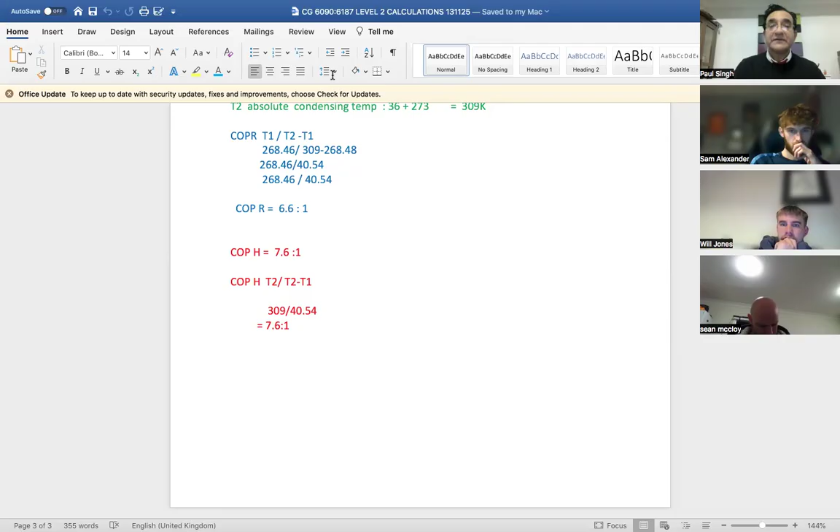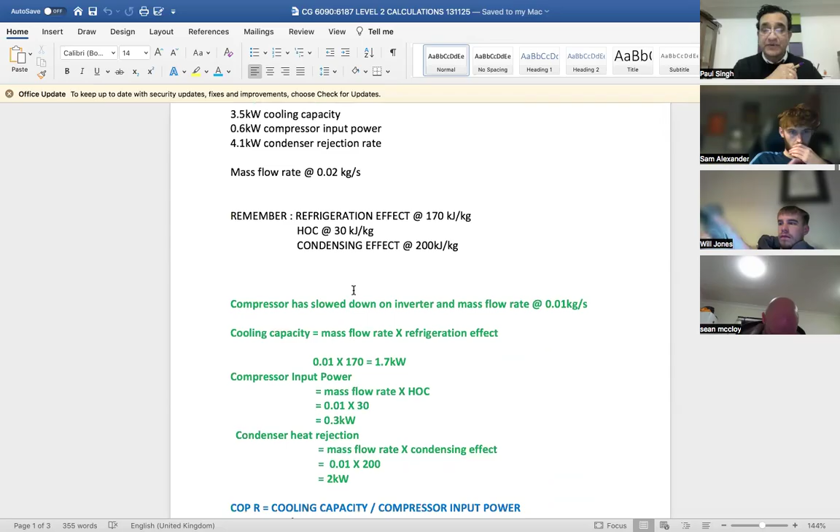Briefly, I'm not going to do the whole lot again, but we're just looking here at pressure enthalpy diagrams and enthalpy, refrigeration effect, heat of compression, condensing effect. Then we're looking at the capacities, mass flow rates, times heat of compression and stuff. It's this formula that eventually you'll need to understand and be able to apply for the online tests.

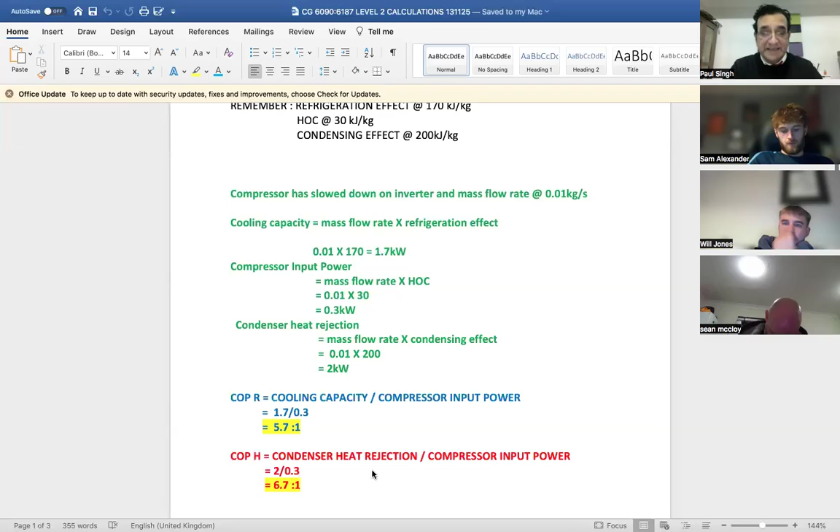And then I went into compression ratio, so pressure ratio, compression ratio: it's absolute discharge pressure divided by absolute suction pressure. And we did some examples.

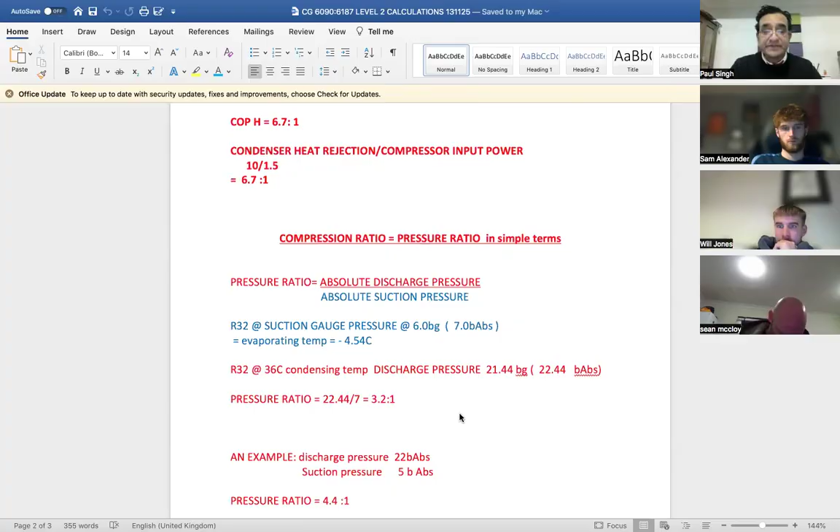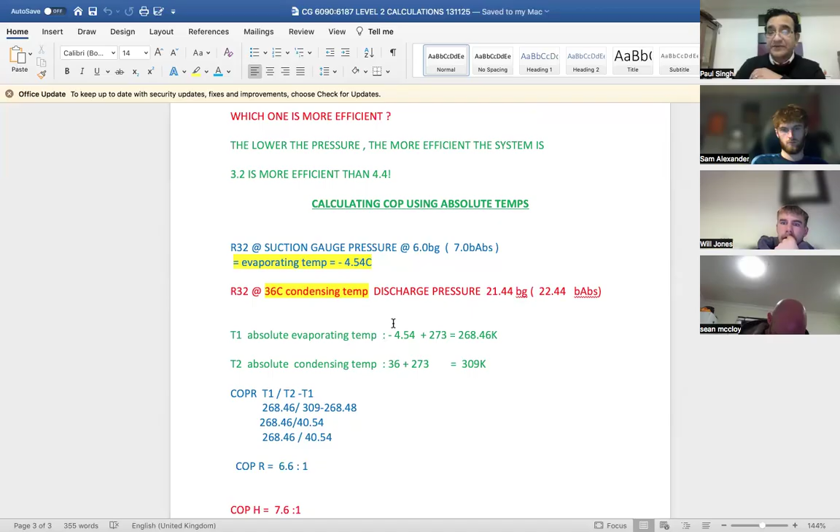And then we also looked at using the temperature and the entropy, well the temperature in particular. So looking at this one here, we said, look, we've got the suction pressure that relates to an evaporating temperature. We've got the discharge pressure, which relates to a condensing temperature. And converting those to absolutes, we can actually work out the COPR and the COPH.

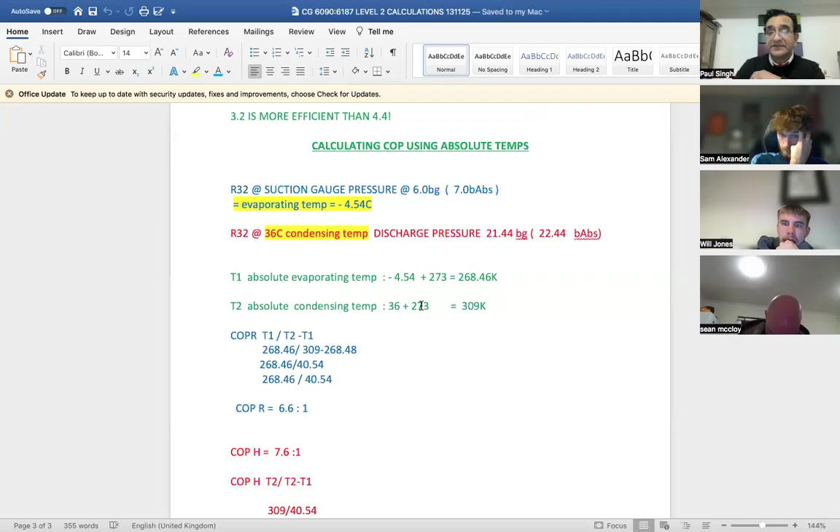So on this one here, we've got evaporating temperature minus 4.54, add 273 to give us 268.46, and then discharge, so condensing temperature 36 plus 273 gives us 309.

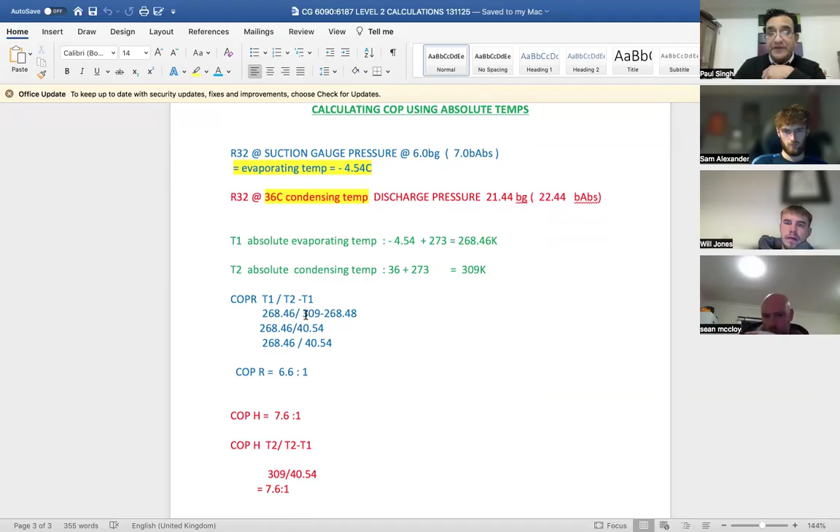And then if we're looking at COPR: COPR equals T1 divided by T2 minus T1. So the evaporating temperature is 268.46 on the Kelvin scale, and you divide that by the difference, 309 minus 268.48, and that mathematically comes out at 6.6 to 1. So the COPR, refrigeration, is 6.6 to 1.

And then COPH, we've got the situation where that's 7.6 to 1. And how we get that: we say T2, which is condensing temperature, divided by T2 minus T1, which is 309 divided by 40.54, which is 7.6 to 1. So these should marry up in the sense that COPR plus 1 is your COPH.

Okay, so I'm just going to concentrate, I'll put the date here: 20th of the 11th, 25.

And so let's say that we've got evaporating temp. Right, we're saying evaporating temperature, let's say that's at 0 degrees C there. So I'll change this to blue.

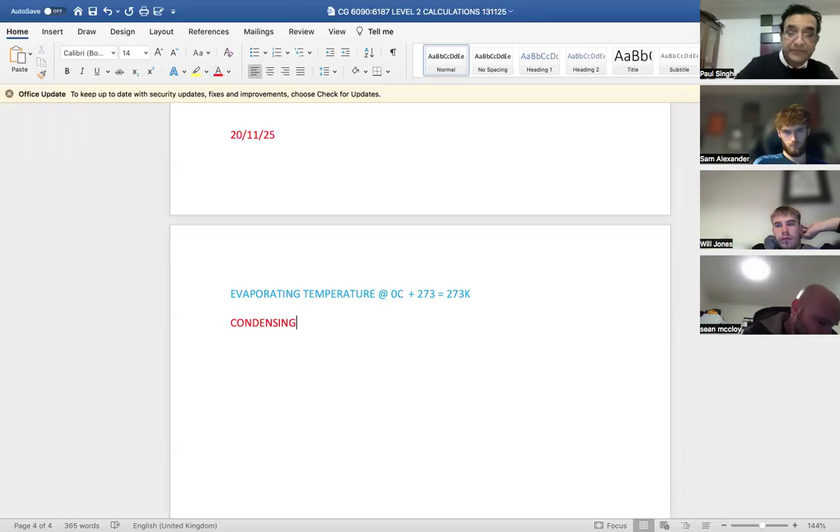And if we add 273, that's going to give us 273 Kelvin. And then if we set the discharge temperature, condensing temperature, that's at...

Let me just get Liam involved. Hi Liam. Yeah, all right Paul. Sorry, yeah I'm good, thanks. You okay yourself? Yeah sorry mate, I was doing something. Okay, not to worry.

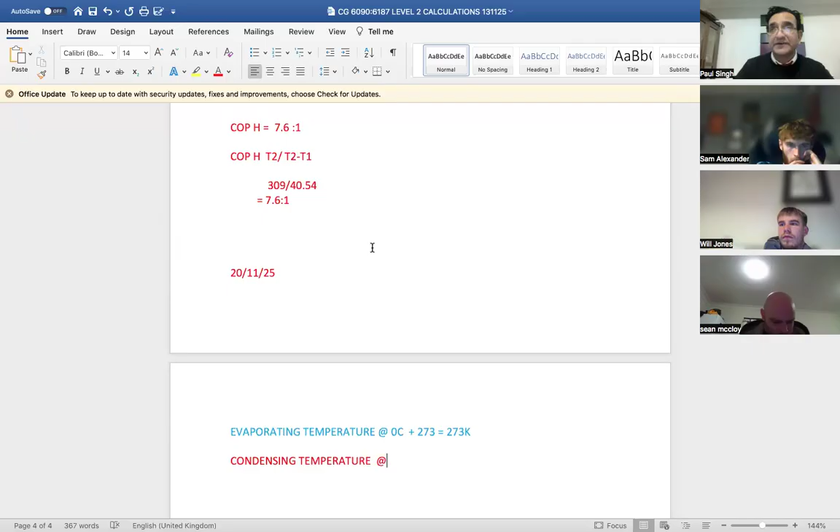I'm just going to continue, Liam, with the calculation we did last week. We did T1 divided by T2 minus T1 to get the COP. So we've got an example here: evaporating temperature is at 0, add 273 it's 273 Kelvin. And if we've got the condensing temperature at 40, we add 273 to it, and that gives us 313 Kelvin.

Hi Jamal, you okay? Yes, hello Paul, sorry I keep having trouble joining your links, I don't know why, sometimes I have problems every week joining it, every single week. Is that because of the web? I have to type it in manually, I've learned that now. Every week I'll have to look at why, because normally I'm not on the receiving end of what I'm sending out, but we can have... It works for Gaz, he told me he just clicks on it, but when I do it just will not have it. Yeah, it works for me as well, I just press on it and it loads.

Okay, so what we're saying is here - hi Owen. Hi Paul, sorry about being late. No, that's fine, so we're just continuing on doing another example of COPR, COPH using T1 and T2. So we got here evaporating temperature is 0 plus 273, that gives us 273. And the condensing temperature, 40 plus 273 is 313.

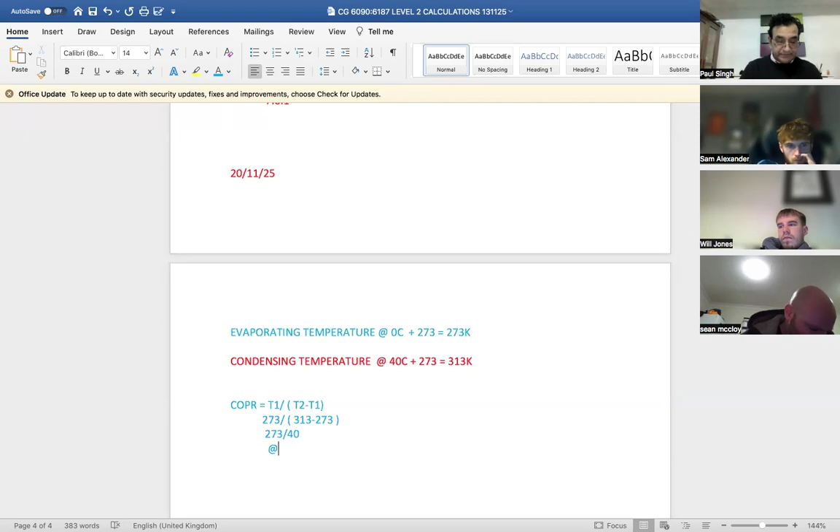Okay, that's going to give us 273 divided by 40. If we do the maths on that, 273 divided by 40 gives us 6.825 to 1.

Now, knowing that the COPR is 6.825 to 1, let me change my pen to red. So COPH, what would that be then, without doing any calculation, from knowledge? We've got COPR 6.825 to 1, then your COPH, what would that be? Any thoughts? So what that will be, it'll be COPR plus 1. I'll change the color to blue.

So we're saying it's 6.825 plus the 1, which equals 7.825 to 1.

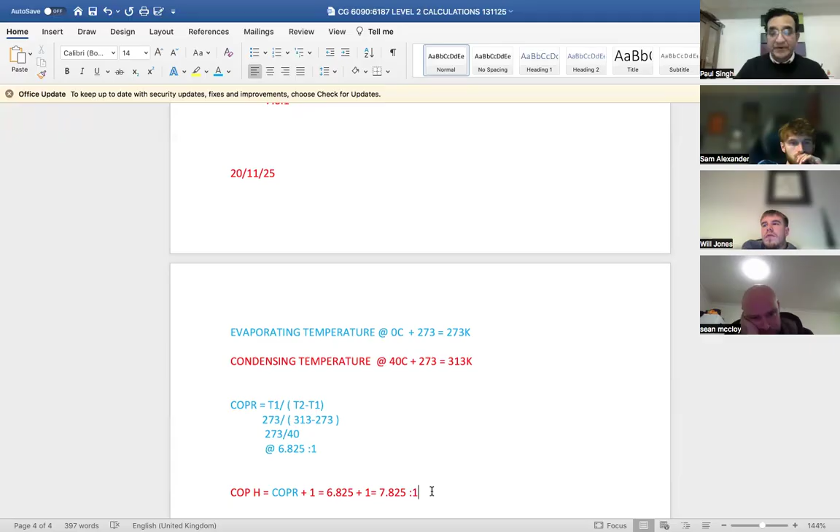And that's using a temperature scenario. What I do want to ensure is that you know what that means. So what does this mean? This is a revision, and I want to go over what this means.

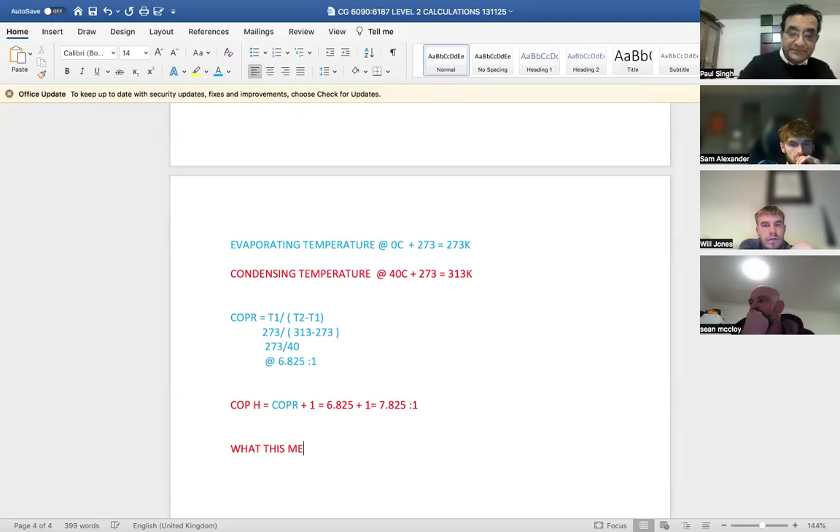So what this means is, let's say we've got a 1 kilowatt compressor. In that case, if you're looking at COPR at 6.825, it means a 1 kilowatt compressor gives 6.825 kilowatts of cooling.

And a 1 kilowatt compressor, on the heating or condenser side, is going to give us 7.825 kilowatts of heating. Does that make sense? So what I'm saying is, you've got a 1 kilowatt compressor, because the COPR is 6.825 to 1, it gives us 6.825 kilowatts of cooling and 7.825 kilowatts of heating.

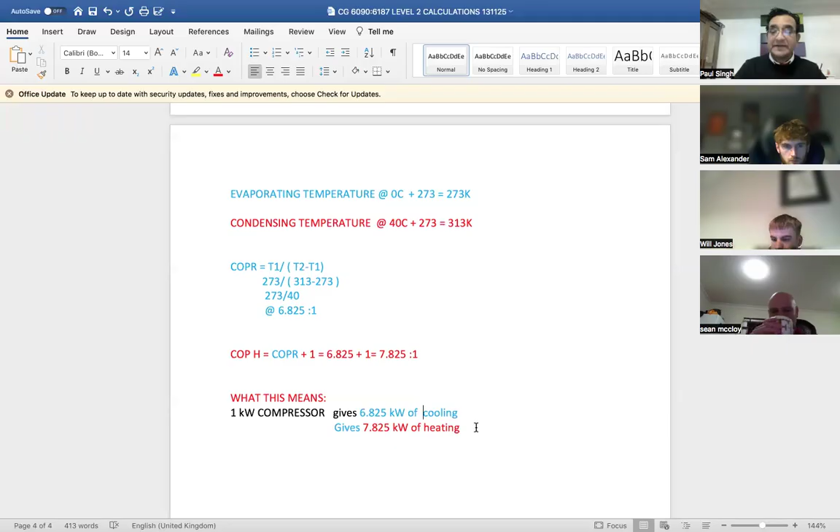Now, if that compressor is doubled, say 2 kilowatts, it's going to double that. If it's 3 kilowatts, it's 3 times - it's a ratio. I want to show you that efficiency. So we're getting 6.825 to 1 and 7.825 to 1. Let me give you a comparison, just to drive it home as a revision discussion.

If we consider an electric heater rated at 1 kilowatt, it will give 1 kilowatt of heating. So you've got 1 kilowatt going into it, and 1 kilowatt coming out of it. What we're saying here is we've got a compressor that's 1 kilowatt rated, and because of the air conditioning cycle, we actually get 7.825 kilowatts of heating out of it. So it's 7.825 times more efficient.

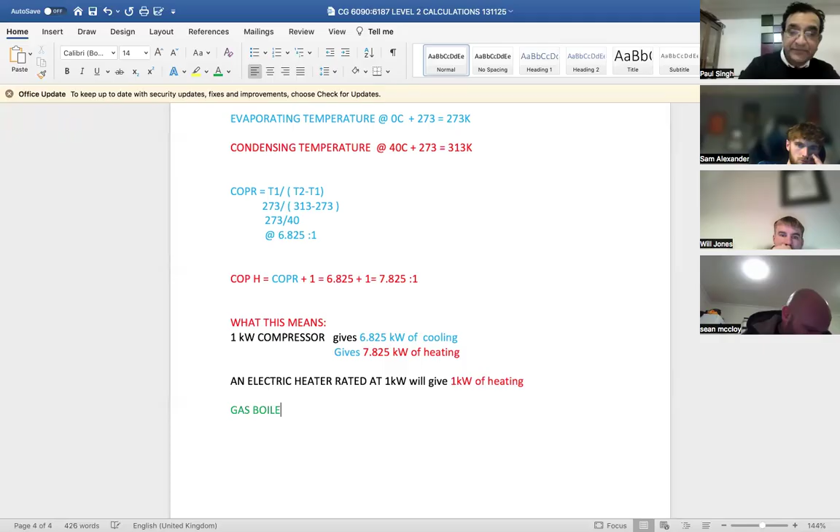I want to take this a bit further, particularly with heat pumps around and stuff like that. If we consider a gas boiler - and I'm going to be asking the gas boiler guys - what kind of efficiency do we get out of a gas boiler, percentage-wise? Any thoughts? 20%? 20% efficient, or you're losing 20%? Losing 20%. So Will's saying the gas boiler efficiency is approximately 80%.

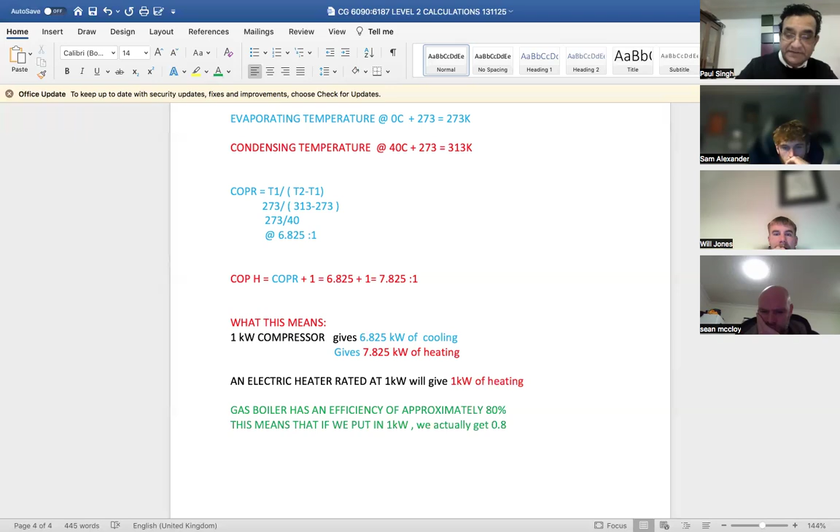80%. Now what that means is, if we put in 1 kilowatt, we actually get 0.8 kilowatts. So you can see if you look at gas-fired boilers, because their efficiency is less than 1, they're very inefficient - that's 0.8 efficient. We're putting in 1 kilowatt and only getting out 80% of that. And if it's 2 kilowatt rated, we get double that, 1.6 for 2. So that gets less and less.

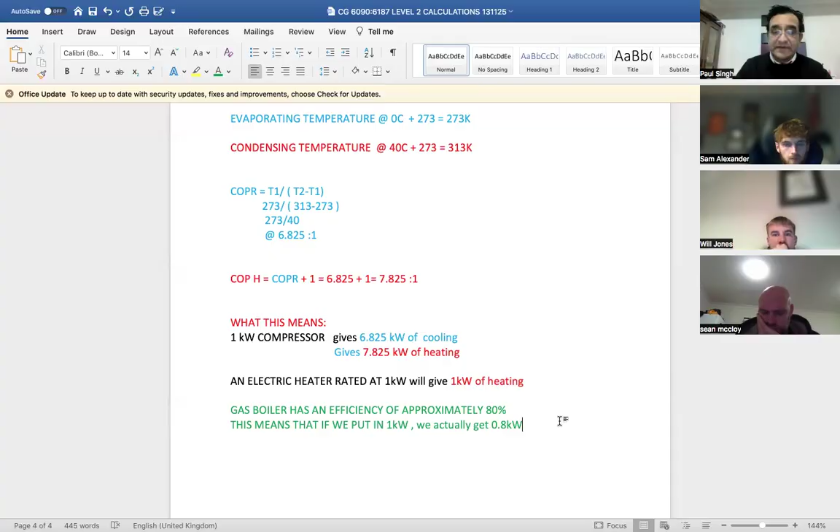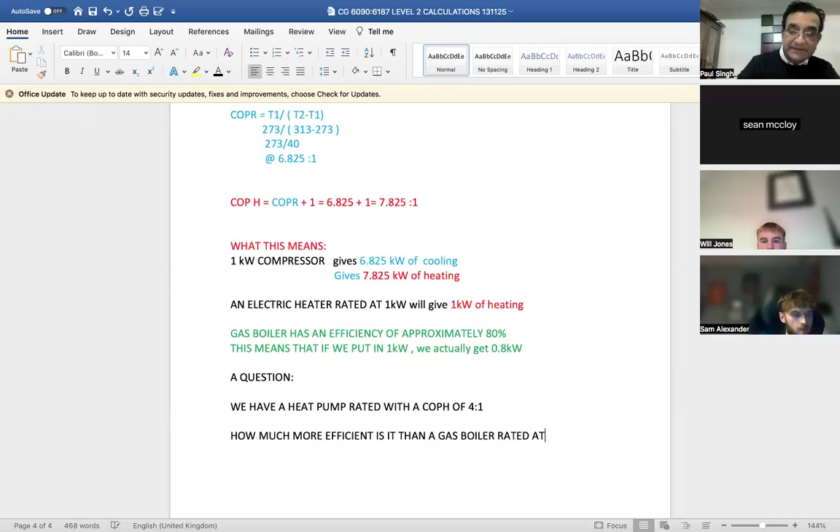Now, a typical question on the diploma might be: let's say we have a heat pump rated with a COPH of 4:1. How much more efficient is it than a gas boiler rated at 80% efficiency? That's what we're looking at.

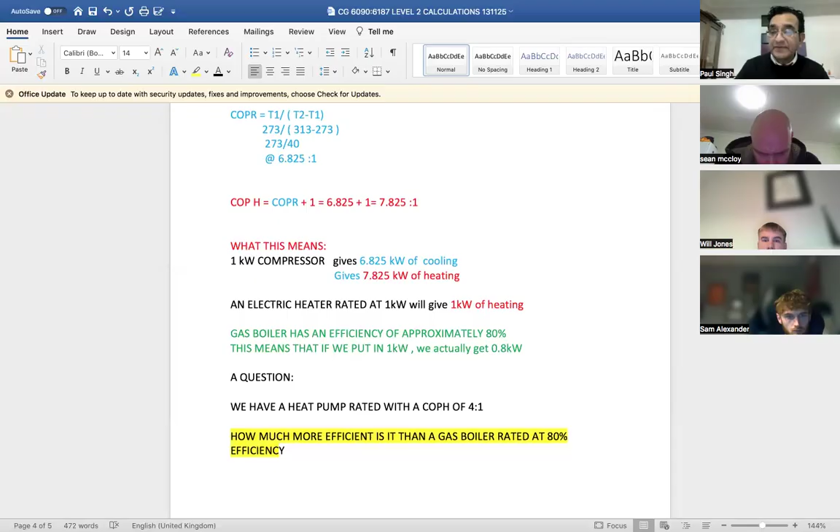Any thoughts on that? 320%? Let's have a look at that. I'll just put this in here - 320%, I'll just put that there for now.

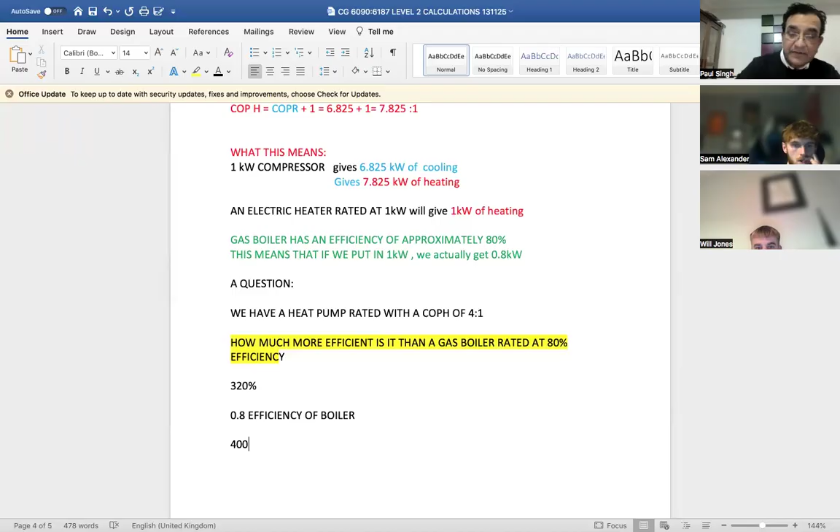Right, so if we look at it, what we're saying is, if we wanted to, so we've got 0.8 efficiency with a boiler, and we've got basically 400% efficiency of a heat pump.

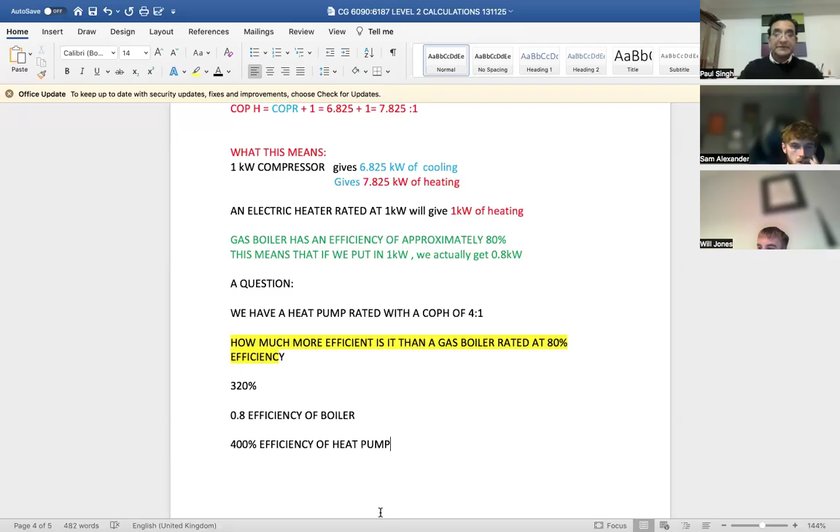So what we're saying is really that's 0.8. You could say that's... if we looked at so, to get 1 kilowatt of heating from a boiler, okay, we need to put in...

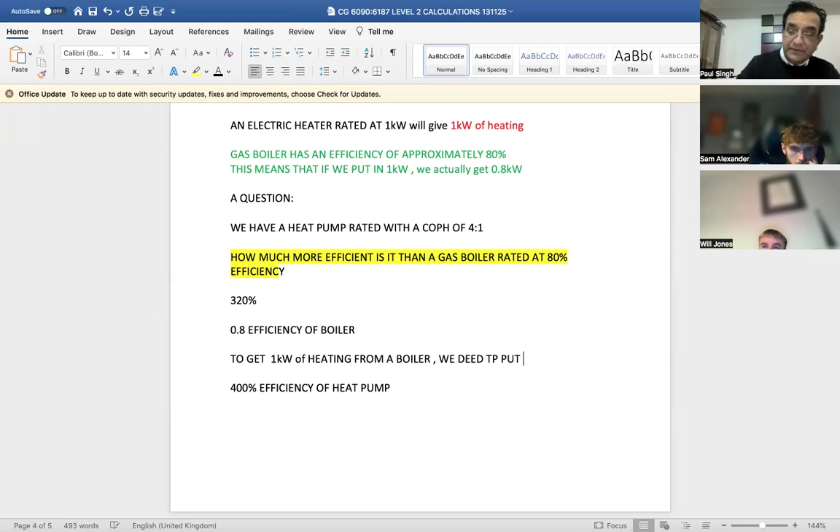So what I'm saying is, if I put in 1 kilowatt, I'm only going to get 0.8. So we need to put in basically something like 1.25 kilowatt to get 1 kilowatt. Approximately, okay.

In fact, you could probably say 1.2. It's going to be, yeah, you can do that, 1.2, because 20%. So that's 20% basically.

So what we're saying is we need to put in 1.2 kilowatts to get 1 kilowatt out, and here we're putting in 1 kilowatt to get 4 kilowatt out. So comparing it, we're saying we need to put in, okay, we got 4. That's 4.

That's for the heat pump, and then we're going to have to go back towards basically 1.2. So what we're saying is, if you're looking at 1 here, we have to put in 1 to get 4 kilowatts, which gives us 4 kilowatts of heating on the refrigeration cycle condenser. But to get 1 kilowatt of heat out of a boiler, we have to put in 1.2 kilowatts.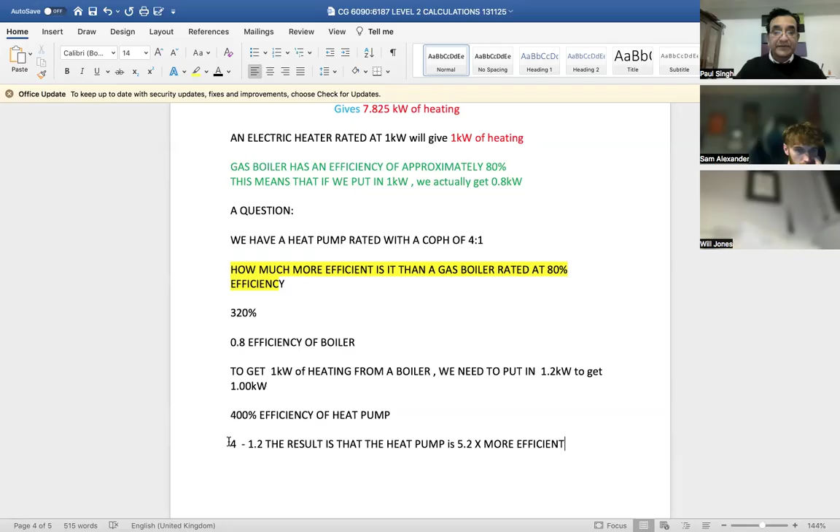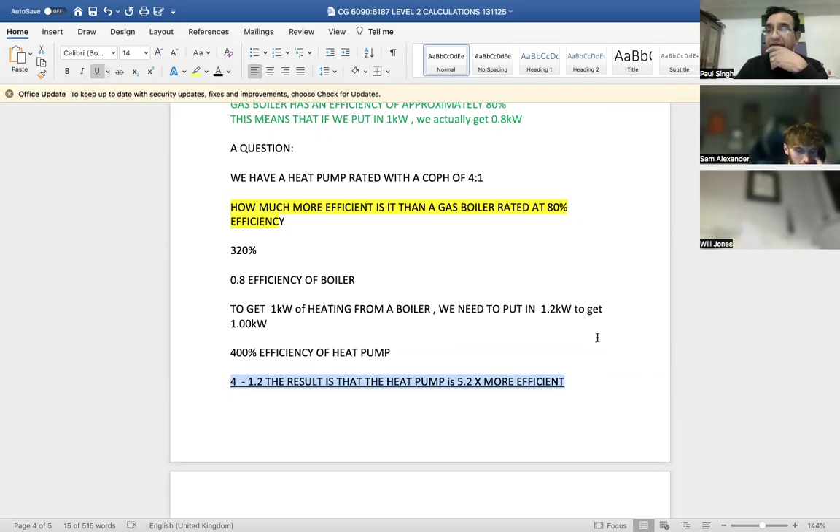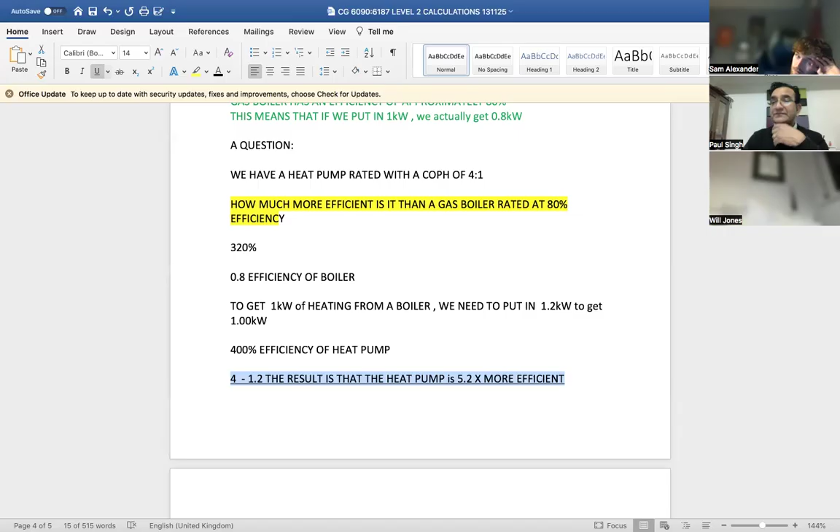Okay, Will, do you agree with that? Approximately, or not? So Will... okay, oh, he's gone. Okay. Right. Sam? Does that make sense to you? Paul, kinda, oh, kinda, yeah.

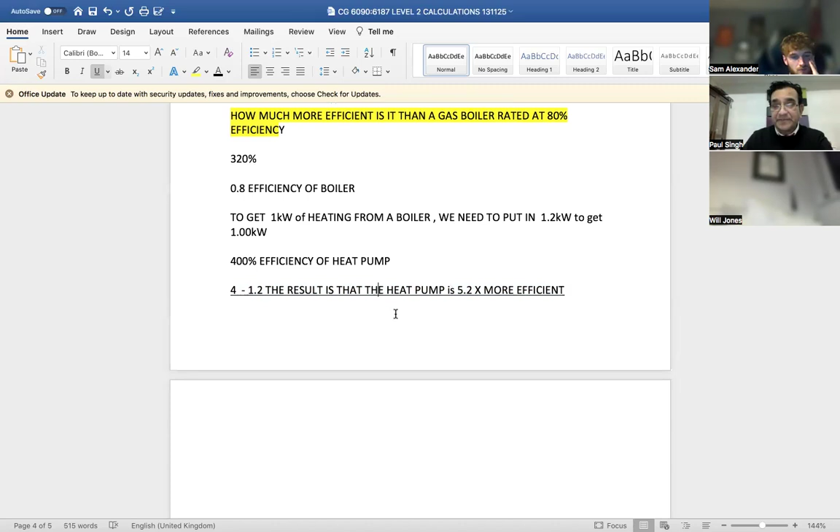So what we're saying, basically, to the lads, yeah, we're putting in 1 kilowatt, we're getting 4 kilowatt there. And what we're saying is, for the boiler, we're putting in 1 kilowatt to get... no, putting in 4 to get 4 kilowatts out, you know, COP of 4 to 1. And to get 1 kilowatt of heating from a boiler, we have to put in 1.2. So 4 plus the 1.2 gives us 5.2.

Paul, I have a question. I said 320%. Is that still wrong? It's wrong. In fact, the correct answer is 520%. Yeah, that 5.2, yeah.

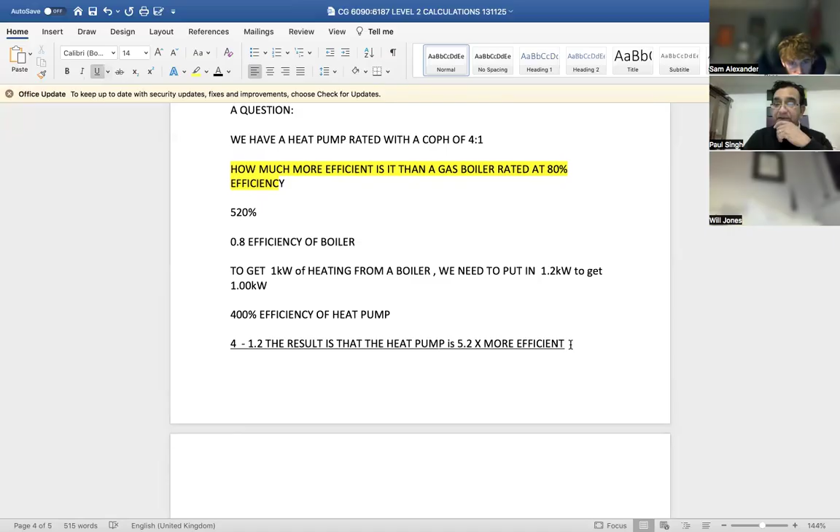So what I'm saying really, if you're looking at it from that point of view, the actual efficiency overall compared to a gas boiler is 5.2 to 1. So we're putting in 1 kilowatt, and that's going to give us 1.2 kilowatts from the boiler plus the 4 that we get from the aircon unit, heat pump unit.

So that's how efficient that system is. Or if we're comparing the heat pump to the gas boiler, Paul, why do you add it instead of minus it? That's why I don't understand. It's a difference, yeah.

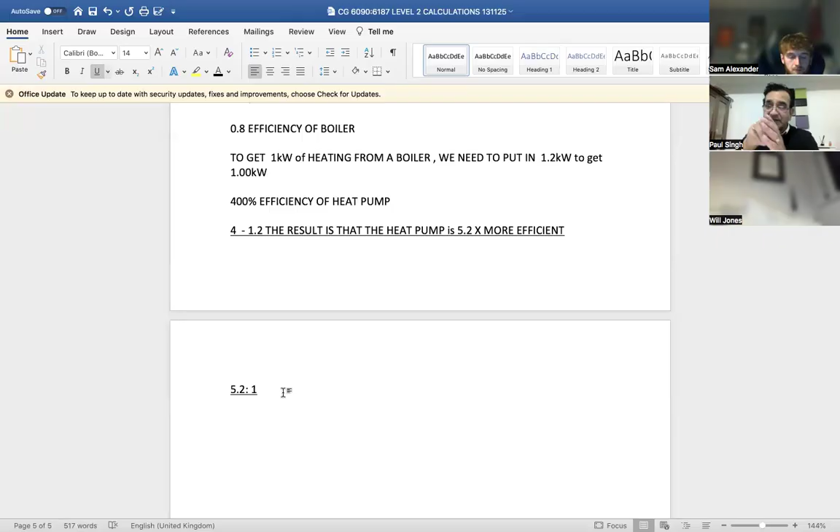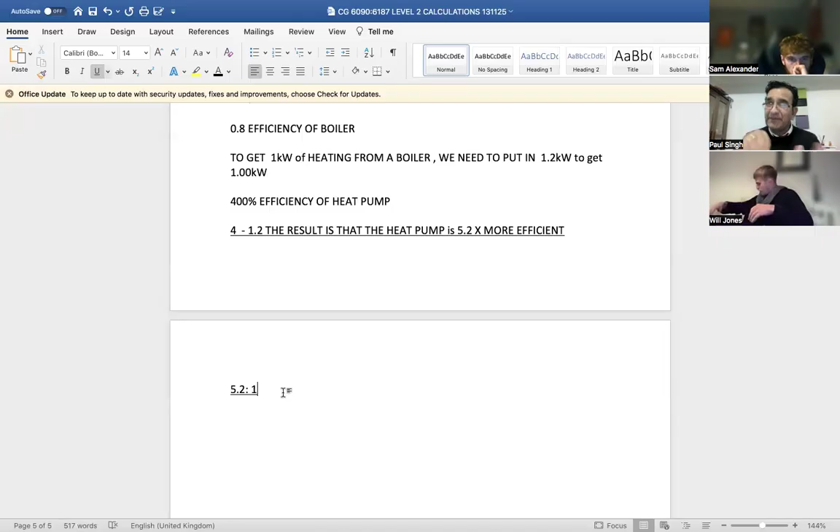Well, so with the heat pump, we're putting in 1 kilowatt to get 4 kilowatts out. That's positive. Whereas on the heating side, on a gas boiler, if I put in 1 kilowatt, I'm only going to get 0.8 of a kilowatt out. So to make it balanced, to get 1 kilowatt out with a gas boiler, I'm actually going to have to put in 1.2 kilowatts. Okay, because of the losses.

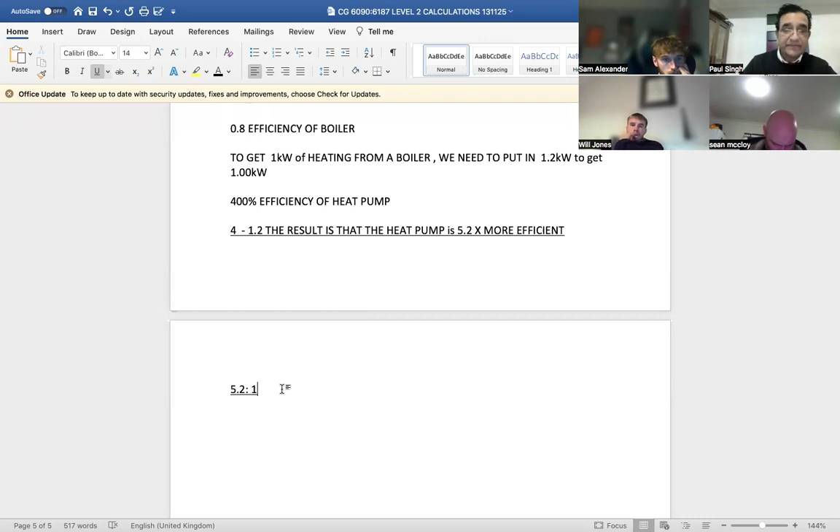So we're saying that in a boiler, we're putting in 1.2 to get 1 out. As Will said earlier, we're losing 20%. So that 20% is actually wasting energy. So if we're looking at this, gas is the least efficient.

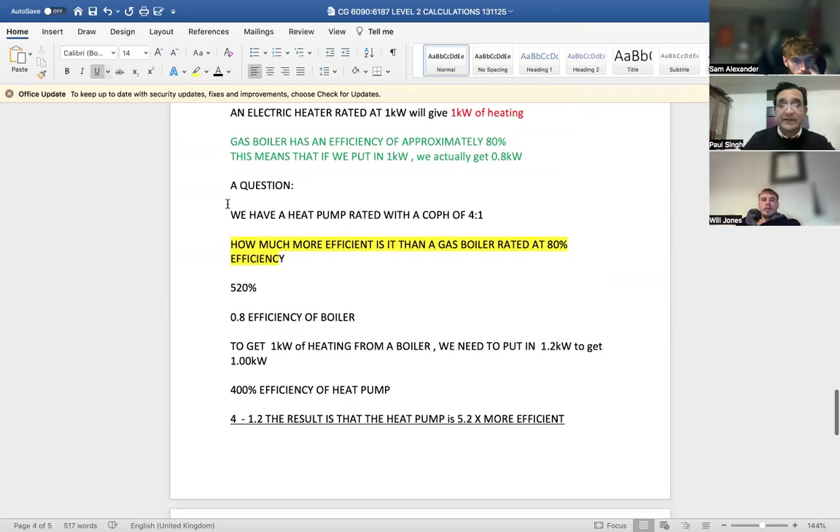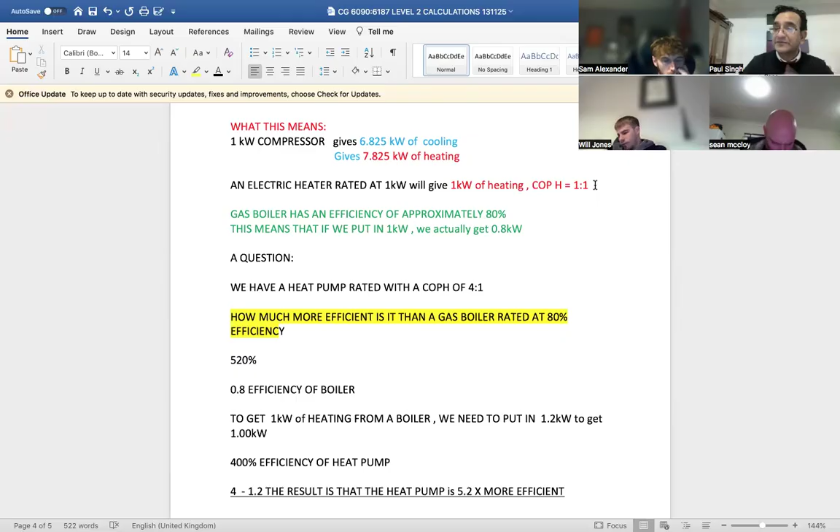That's only 0.8 efficiency. Then we got electric heater, and that's a COP of 1 to 1. So this could be, I'll just write this here: COP heating, okay, that's going to equal 1 to 1. We're putting in 1 kilowatt and we're getting 1 kilowatt out.

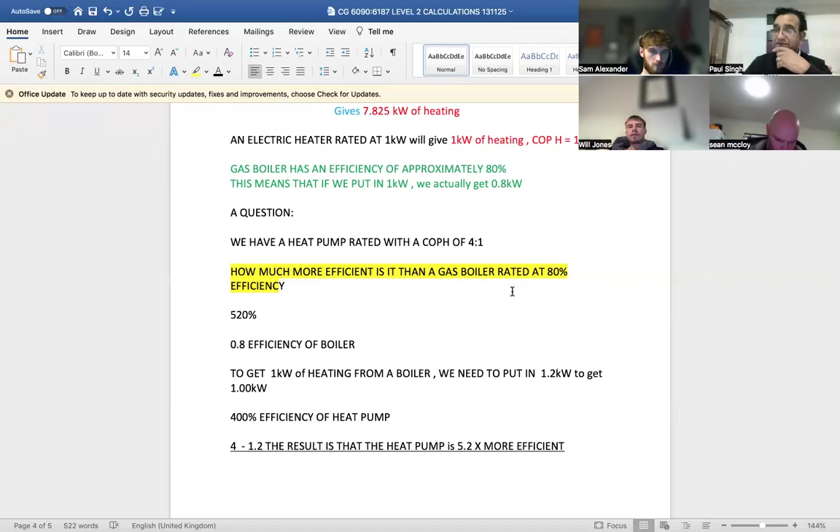On a heat pump, we're putting in 1 kilowatt, and we're getting 4 kilowatts out. But with a gas boiler, we're putting in 1 kilowatt, but we're only getting 0.8 of a kilowatt out. Okay, so that's the scenario there.

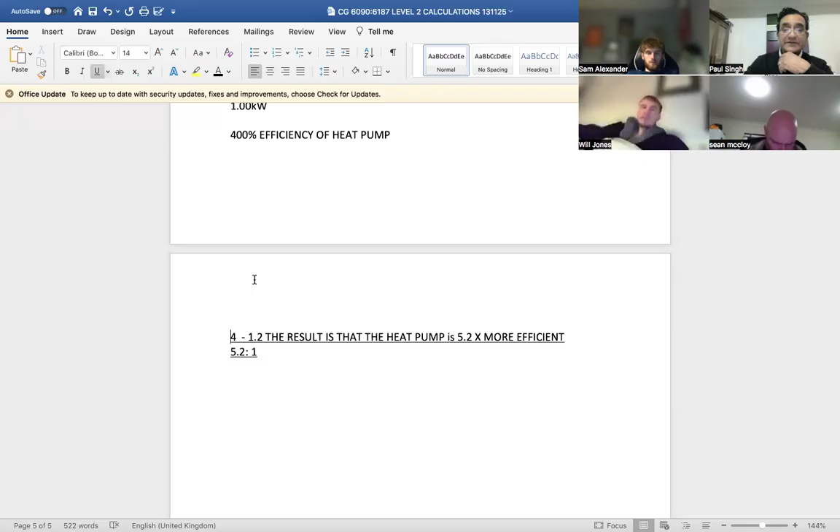So here we're getting 5.2. I'll just move this down. So the difference is it's actually 5.2. It's going to be 4 plus 1.2. So it's 5.2 times more efficient, 5.2 to 1. Right, okay.

Question 2 then. That was A, or question B, sorry, okay. So it's saying boiler. Boiler is 70%.

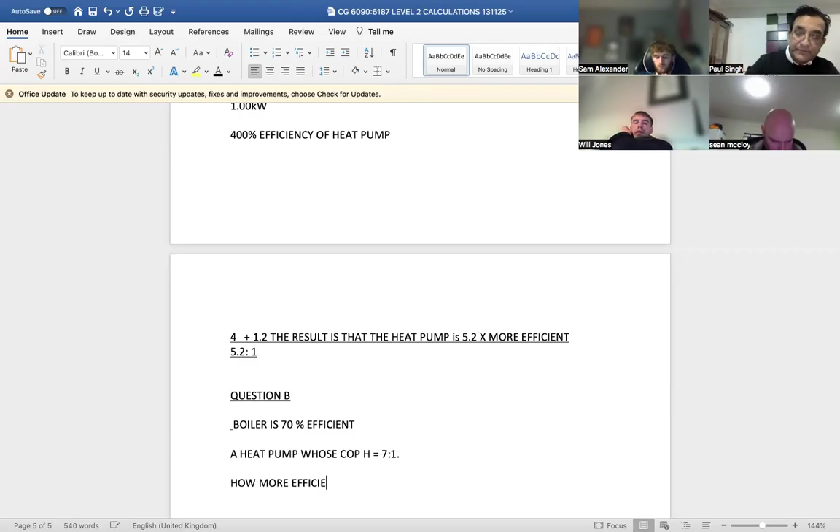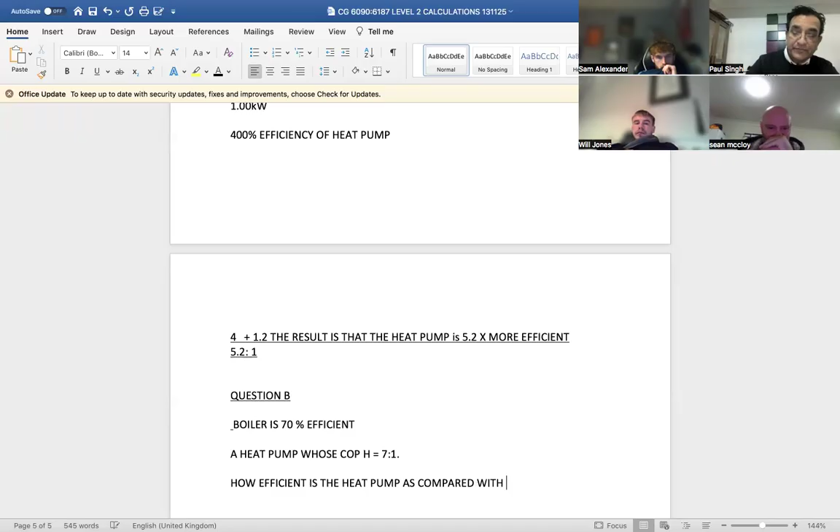Okay, we have a heat pump whose COPH is 7 to 1. So my question is, how efficient is the heat pump as compared with the gas boiler? Okay, so basically what we're saying is, look, that's 70% efficient.

So with a boiler, it's going to be at... we're going to have to put in... is it 8.3 or something? Yeah, you're right, 8.3. So boiler is going to be 1.3 plus whatever the efficiency, the COP of the heat pump is, which is 7. So that's going to be 8.3. So this heat pump is 8.3 times more efficient than the boiler because it's got a COPH of 7.

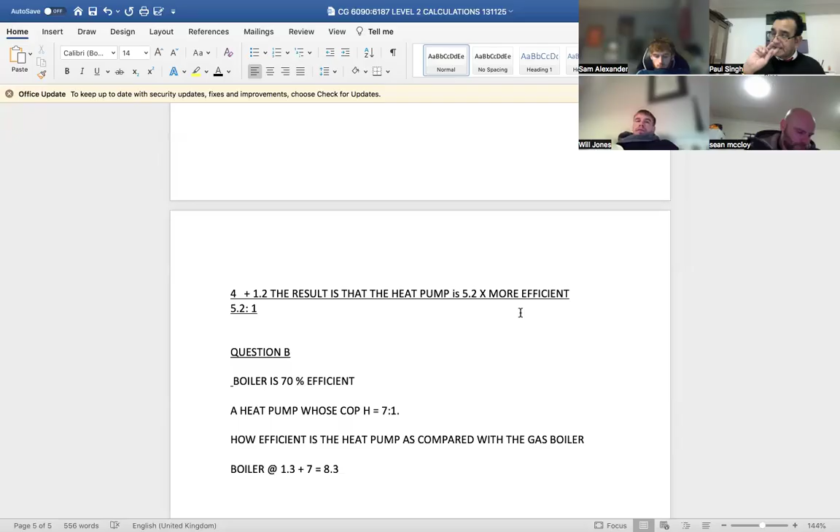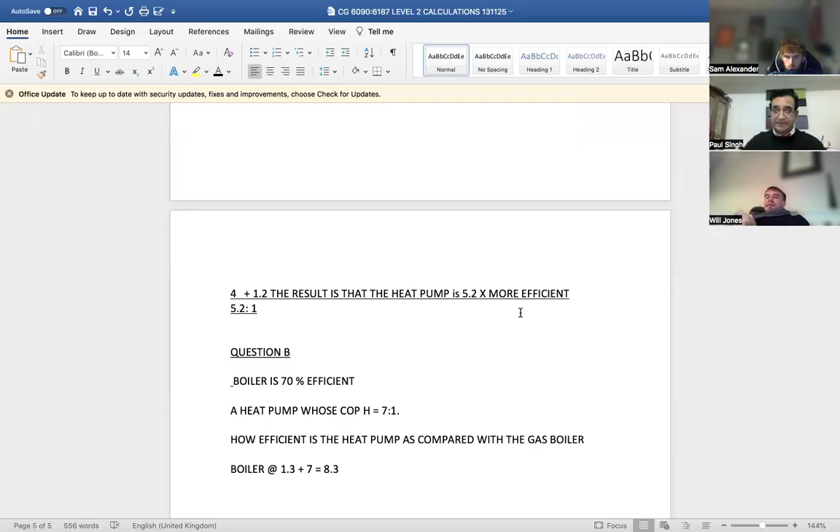Well, what do you do if they're both positive efficiencies? You won't get a boiler that's more than 100% efficient. Will you not get a question like that? No, that's fine. Now, it's really taken into consideration that we get an efficiency of less than 1, and with the COPH we're getting a positive COP. Really, it's looking at the difference between two numbers.

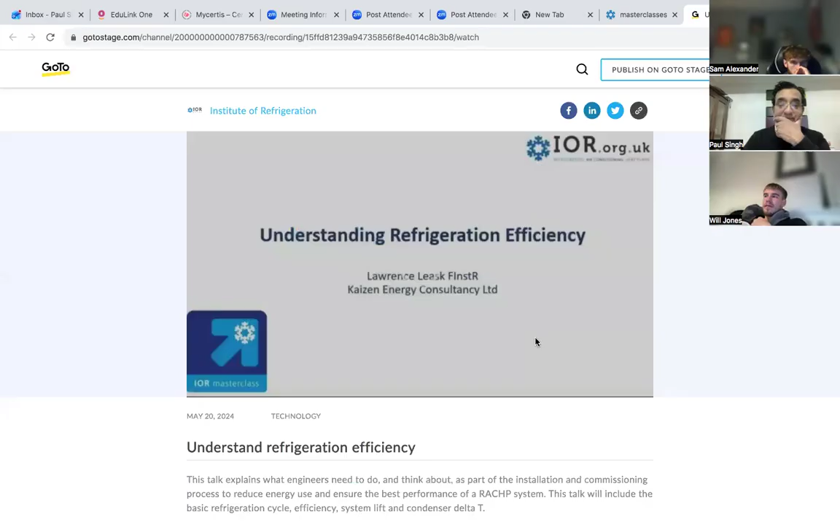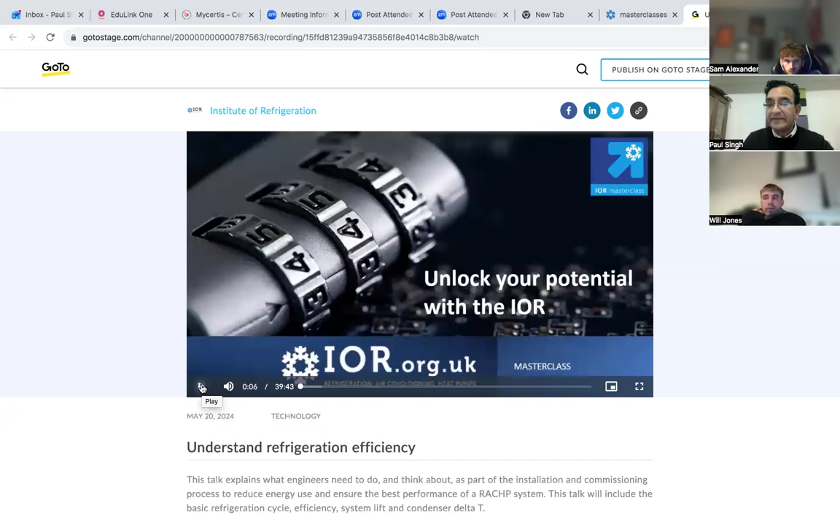But just tell me, sometimes the volume doesn't work on this, so just let me know. Okay Jeff, will you tell me if you can hear the volume, because I can hear it on my screen. No, I can't hear anything as yet, nothing's coming. Now? Nope, could you hear that? Chaps, could you hear that? No, can't hear anything, Paul. Now? Nope, no, no, nothing, can't hear anything. Nah, I can't hear anything, Paul. All right, okay.

I can, I must admit. So okay, so the email was from Alexander Malcolm, Paul. Right, okay, let me just stop this, that's not going to work. Right, just going to stop that. It says set up audio settings.

I think with these masterclasses you have to get onto them yourselves. Now this is what I want to - whilst I'm here, I wanted to remind me, Sean.

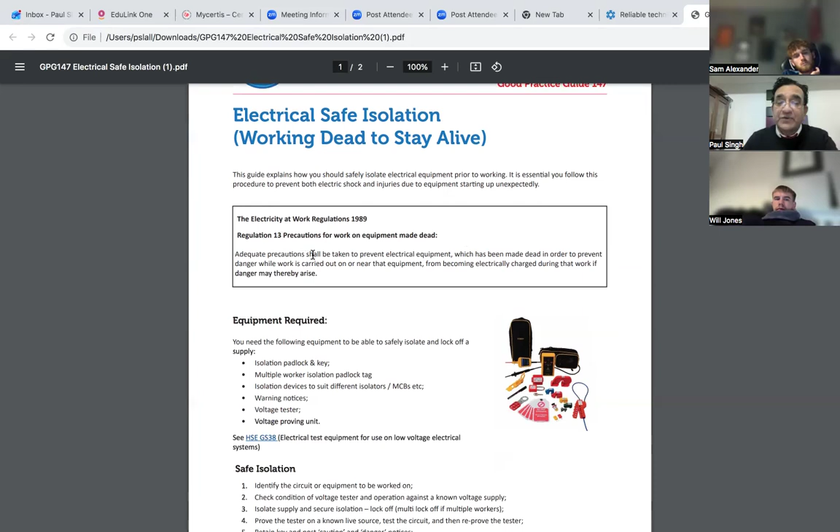I'll actually email this to you guys, because I've downloaded it and I can forward it on to you. So what I'm saying is, the Electricity at Work Regulations 1989, Regulation 13, precautions for work on equipment made dead: adequate precautions shall be taken to prevent electrical equipment, which has been made dead in order to prevent danger while work is carried out on or near that equipment, from becoming electrically charged during that work if danger may thereby arise. Equipment required.

Paul, can I be excused? My daughter's just called, I'm going to head over to her. Okay, no worries. I'll speak to you tomorrow. By the way, yeah, okay.

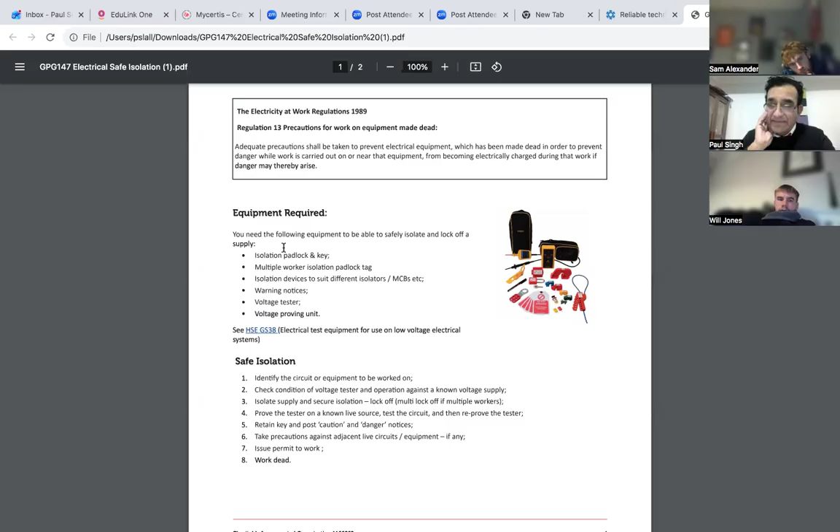Owen, do you carry out safe isolation? Yep. So what kind of things do you get up to then, please, Owen? Locking off, like panels. Excellent, making sure you have the key with you if leaving it unattended. Brilliant, excellent, no, that's great. What about Liam, do you safe isolate? Liam, do you carry out safe isolation at the moment? Do I carry out safe isolation?

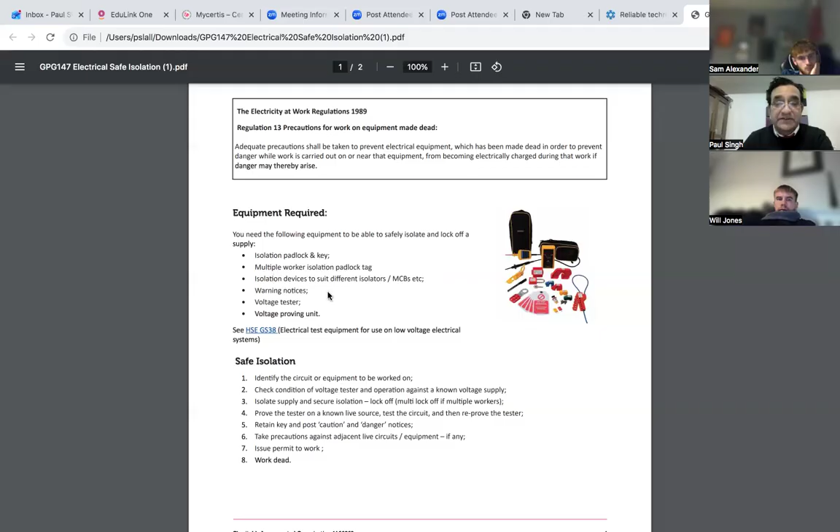Yeah. So what I'm saying here is you've got the equipment required. You need the following equipment to be able to safely isolate and lock off a supply: isolation padlock and key, multiple worker isolation padlock tag, isolation devices to suit different isolators or MCBs, etc., warning notices, a voltage tester, and a voltage proving unit. It does tell you, HSE GS38.

Now, GS38, I harp on about it because that gives you the safety factors that your test meter should have, things like finger guards and no more than 2 millimeters of probe showing on the end of your test probes.

Okay, so safe isolation: number one, identify the circuit or equipment to be worked on. Check condition of voltage tester and operation against a known voltage supply. Isolate supply and secure isolation. Lock off, multi-lock off if multiple workers.

You get a lock where you can actually put more than one padlock on. So you might have four engineers or four contractors, and each will have their own padlock with key, and they keep the key on themselves. So if there's four padlocks on, all four of you will have to isolate it before it can be switched on for safety. We don't want anybody being electrocuted.

So what we're saying here is I identify the circuit or equipment. I don't know why people are asked about getting electrocuted, I get electrocuted all the time. So why do you get that? Nah, I should be safe. Electrocuted twice, but it doesn't even hurt. It was weird. You should try to be a bit more safe.

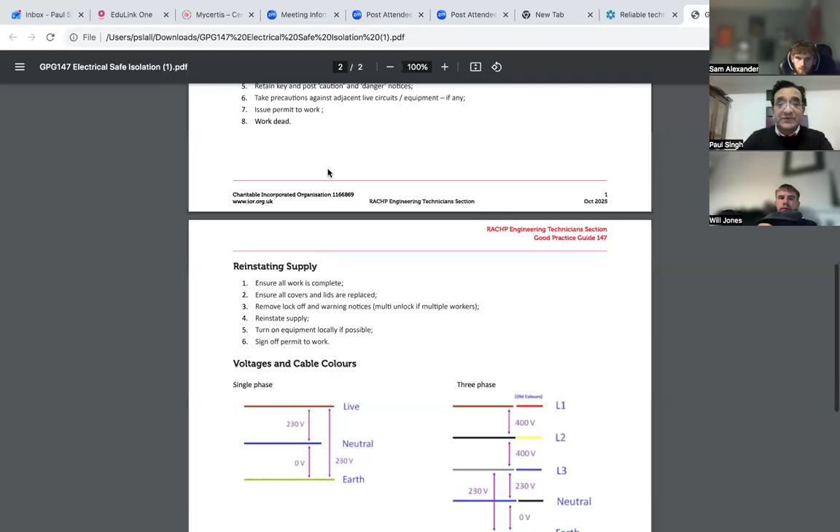You've got your outdoor unit and indoor unit interconnected, but then you could have the condensate pump supplied from a fuse spur from somewhere else, from another socket somewhere up in the ceiling. So that's why you check for dead, to make sure that condensate pump isn't live if you're going to work on it. And that's what working dead means. Work dead means exactly that.

So there's no supply. Here, reinstating supply: ensure all work is complete, ensure all covers and lids are replaced, remove lock-off and warning notices. Multi-unlock if multiple workers, reinstate supply, turn on equipment locally if possible, and then sign off the permit to work.

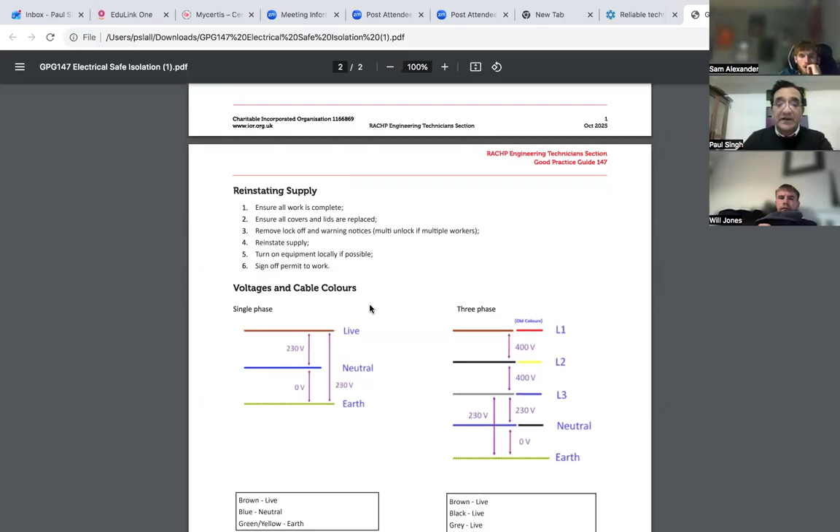And here you've got the voltages. So this is a single phase supply, live, neutral and earth. This is just confirming that between live and earth, you get 230 volts. Between live and neutral, that's also 230 volts. However, across neutral and earth, it should be 0 volts. So sometimes, for example, particularly in a pressure switch, we have no neutral in pressure switches.

So what you do is put one probe onto the earth, the other onto the live contact, and if you've got 230 volts, it's telling you that pressure switch is live, you're getting supply to it, it's not broken. Whereas if you go from earth to live and you get 0 volts, it means the switch is open circuit, there's no supply there. That's a good way of checking the switches are functioning, checking 230 volts with the supply on that side.

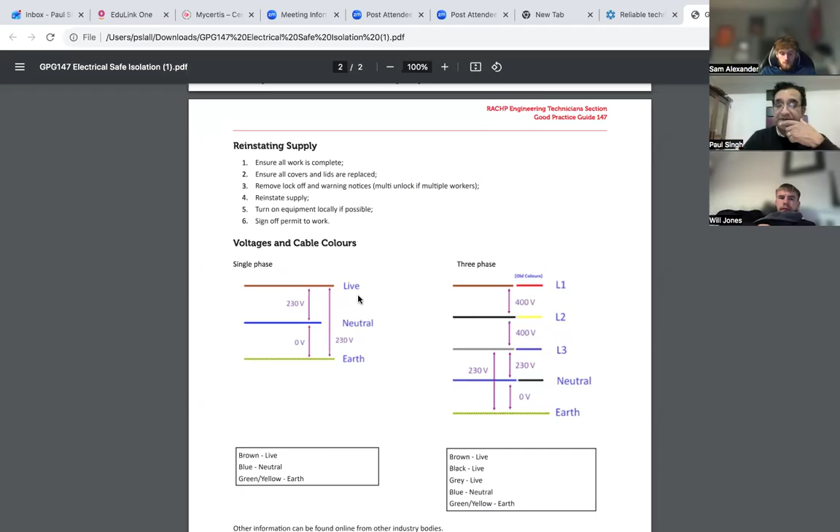On three-phase supply, you've got L1, L2 and L3. You've also got a neutral and an earth. So this is a three-phase, 5-wire supply. 5 wires because you've got L1, L2, L3, neutral and earth. So across phases, across L1 and L2, you get 400 volts. Across L2 and L3, you get 400 volts. And across L3 and L1, you'll get 400 volts.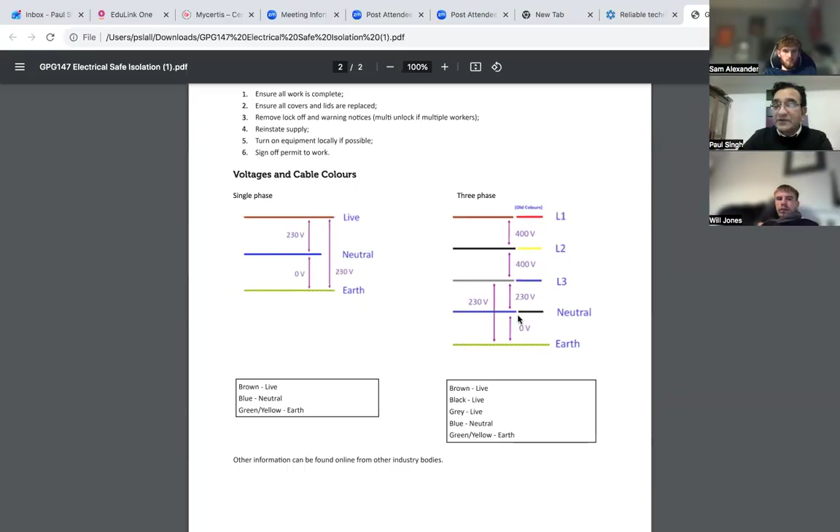However, single phase, from any phase to neutral: L3 to neutral will be 230 volts, L2 to neutral will be 230 volts also, and L1 to neutral will all be 230 volts. So any phase and neutral, you get 230 volts across it. And across neutral and earth, it's 0 volts, no voltage there. And the color coding now for cables: brown is live, black is live 3 phase, grey is live,

and then blue is neutral, green and yellow is earth. On a single phase supply, brown is live, blue is neutral, green and yellow is earth. Whereas in the old days, we used to have red and black. So these are the new color codes - not new, they've been around quite some time.

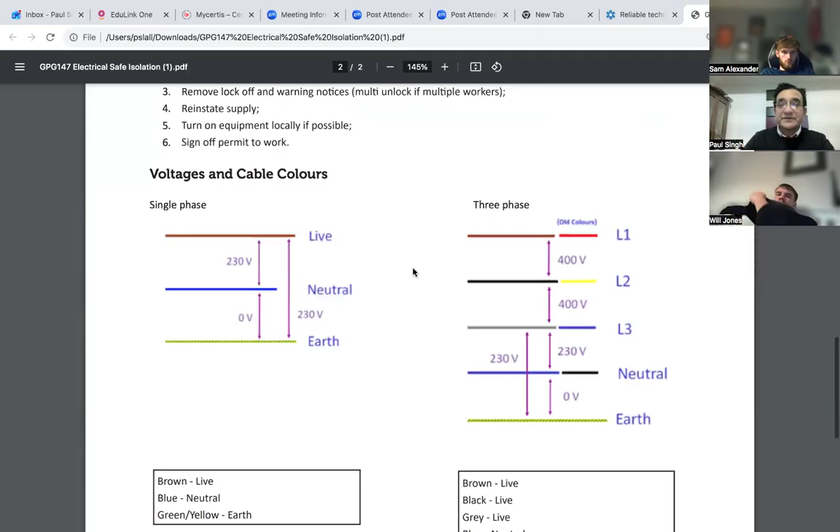Chaps, any questions on that? Will, are you okay with that? I think you're all right, yeah. Yeah, I haven't got any questions. Okay good. Liam, are you okay with this? Yeah, I'm alright with that. Brilliant. Declan?

Harry? Yeah, I'm okay with it. Sounds like that, cool. Jamal? Yeah, I'm alright with it. Excellent. Sam, how are you with this?

Don't know, to be fair. Okay, it is hard stuff. We'll do more of it.

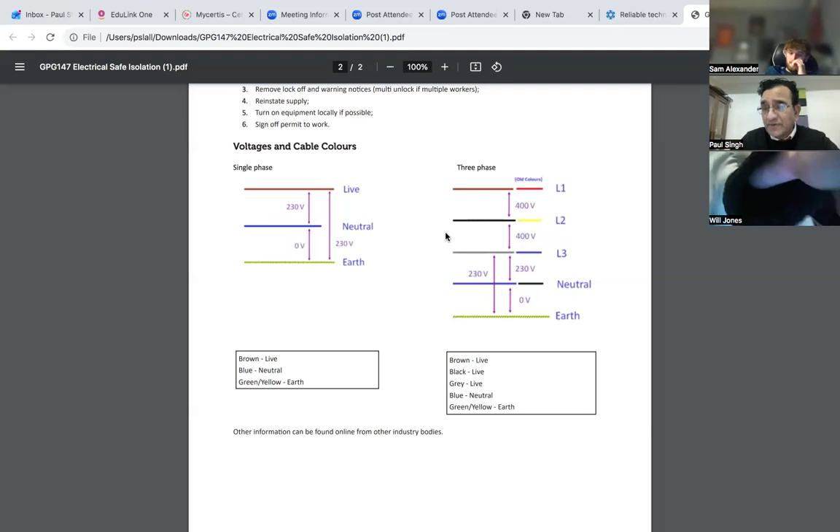Adnan? Yeah, it makes sense when you're reading it, but I probably do need to go over it a few times. Yeah, when we're in the workshop next on Saturday, we'll have a look at bits and pieces on that as well also. And Oliver? Yeah, I think I'm alright with that, Paul.

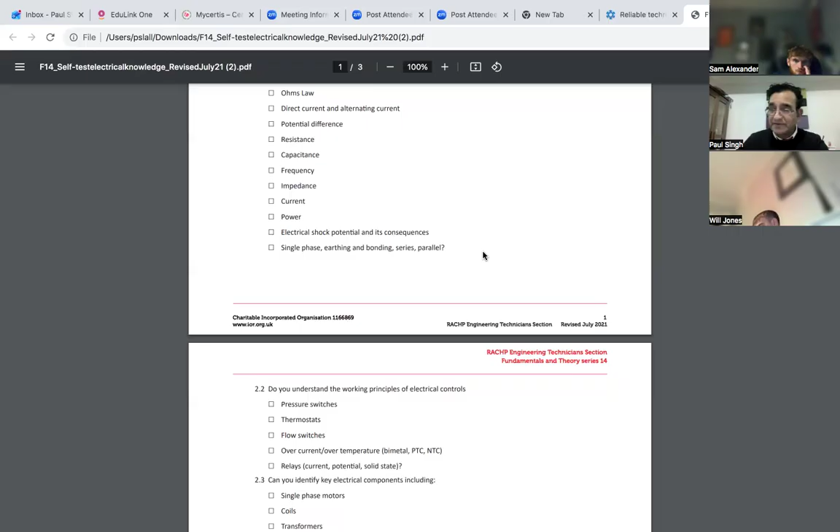So your control circuit - we'll look at some diagrams next time. But load equipment like solenoid valves, condenser fans, defrost heaters, they must be connected in parallel across live and neutral. Whereas switches, they're usually in series with each other and in series with the components. So your LP, HP, your thermostat, they're all wired into the same live before they go on to controlling the compressor or contactor coil.

Do you understand the working principles of electrical controls? Things like pressure switches, thermostats, flow switches? I'll get into that next time.

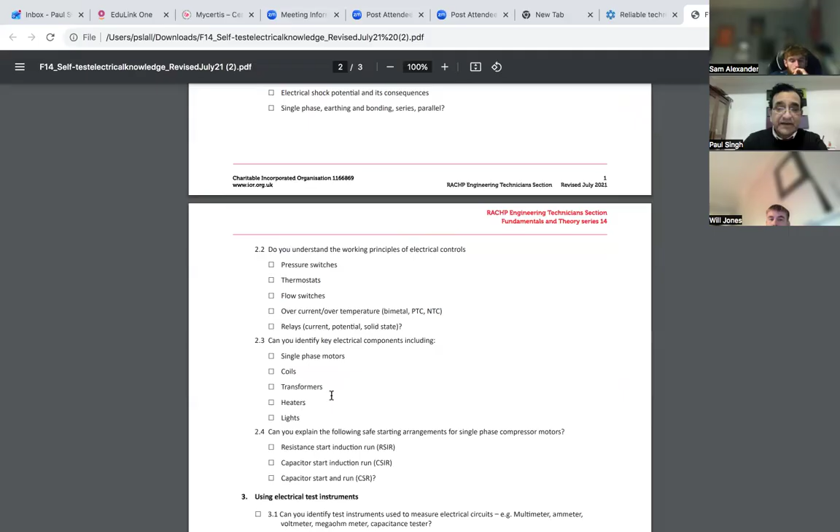And things like motors, resistance start induction run. What I think I'm going to do is email this to everyone later, so you can all have a copy of this, and that's the kind of things you as engineers should have knowledge and competence in. And as we go through, I'll be picking up a lot of stuff on that to aid with your electrical knowledge and then your skill practice as well.

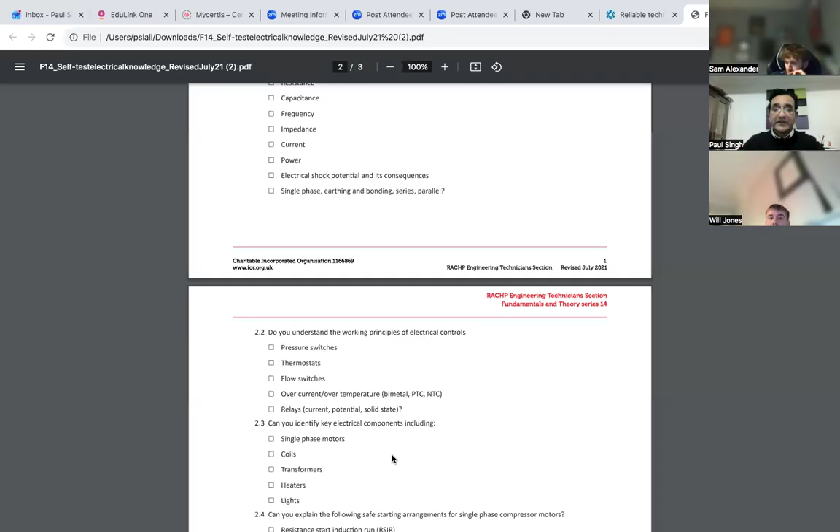Sorry, yeah, I'll have a session on job write-up using the templates as well. But I would urge you to get access to laptops or computers if you haven't already done so. You're not going to do job write-ups on your mobile phones. You're going to be struggling. Really are, because you won't be able to see it.

I think Declan had a go on his mobile phone, Declan. Nah, I weren't able to do it on the phone, so I've always had to try and access a computer before I got the laptop. Hard work. When I come in once, Paul, on a Friday, I had to go on my phone before and it didn't work. Yeah, I'm going to touch base with Dave and Faisal about trying to get that sorted out. Otherwise you're not going to do job write-ups. You're not going to pass.